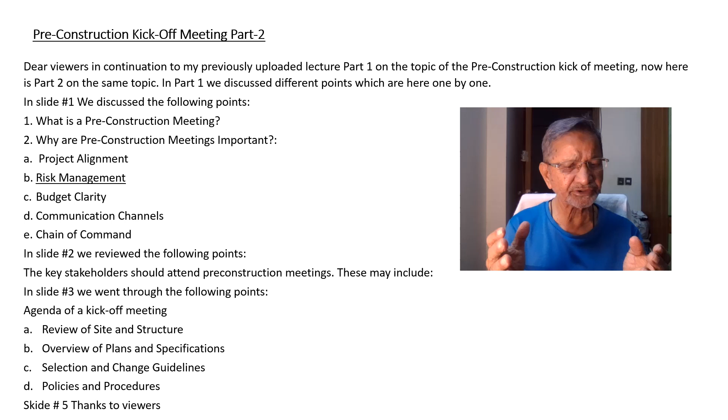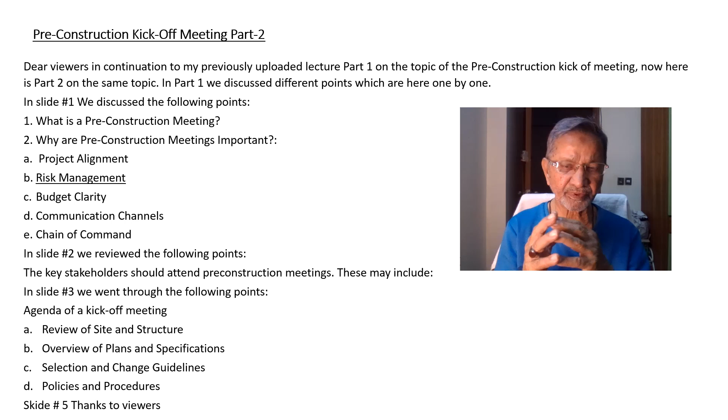In slide number 3 and slide number 4, we discussed the agenda of the kickoff meeting, how to prepare the agenda, and what points to include. First is review of the site structure, meaning to go through and walk the site to see the nature of the project site. Then overview of the plans and specifications, where all documents are gathered at the table of the pre-construction meeting and reviewed and confirmed by the client, contractor, and other stakeholders, so everyone understands everything.

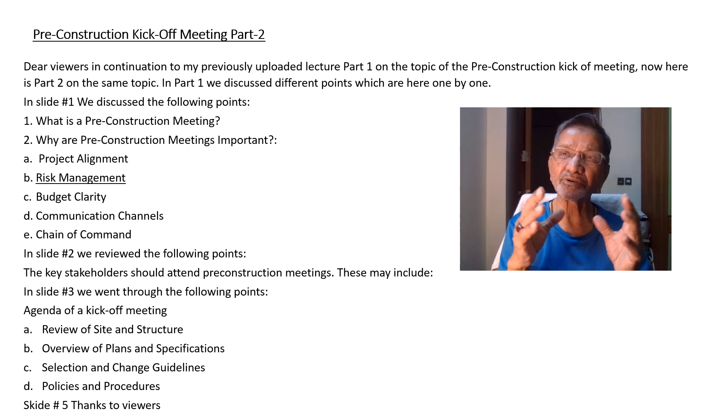Selection and change guidelines: if there are any changes during execution of the project, a change request must be raised and signed by the concerned authority who is changing items, in a plus or minus way. Then policies and procedures: what are the policies of the project, how to run the project, and the methodologies of the project.

These points were discussed in slide number 3 and slide number 4 of my previous lecture on the same topic, pre-construction meeting part 1.

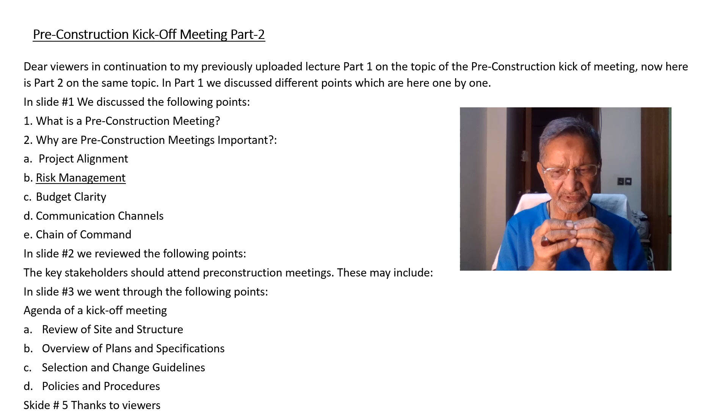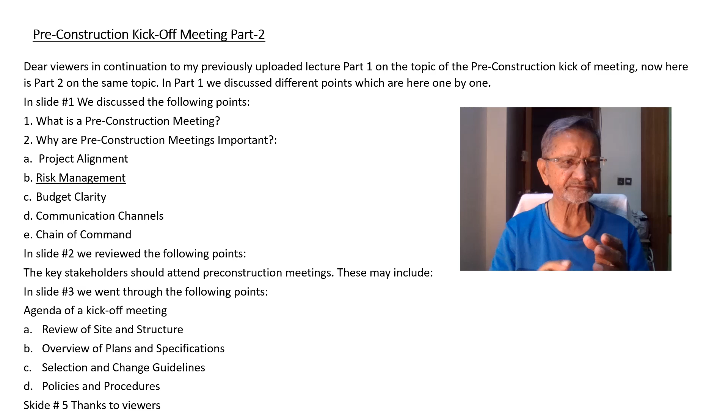Dear engineers, architects, viewers, we are discussing the pre-construction kickoff meeting part 2. The first part, as I explained earlier, I have uploaded on my YouTube channel. I once again request you to please go through part one of the same topic of the kickoff meeting, so that you can understand what happened previously and what is going to be noted down in this lecture.

So number one, in slide number 2: how to prepare for the pre-kickoff meeting, how to make and note down the points, and all the documents to have with you while attending the meeting. These documents are all the agreed and approved tender documents, including the bill of quantities, the specifications, the signed and agreed contract document, the conditions of contract, and especially the drawings. All the drawings must be at the kickoff meeting.

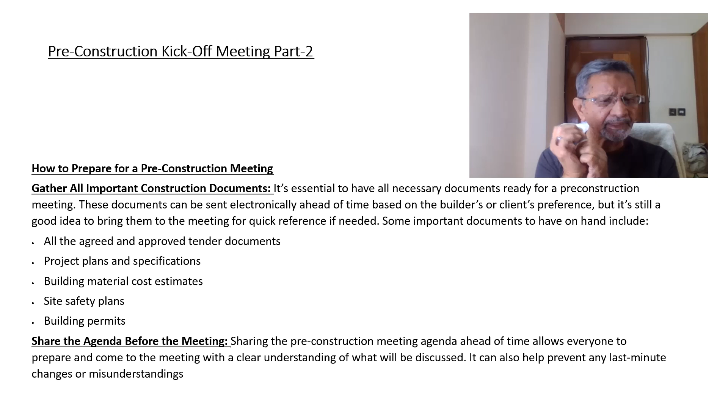Number 2 is the project plan and specification: how to execute, and how to monitor the project. All these things are to be discussed in the meeting.

Building material and cost estimate. This is to be continued throughout the project, but in the kickoff meeting you have to discuss this point also briefly.

Site safety and site safety plans: what site safety plans are shown in the contract document. These site practices are to be followed and implemented by all the stakeholders for their part of the job.

Then comes the building permits. You have to have the approved building permits from the local authorities. They have to approve it, so that at any time the local authorities visit the project, these documents should be available with you.

How to share the agenda of the meeting? This is very easy. You can share it electronically, or by messenger, or by hard copies, as per the clients' and stakeholders' requirements.

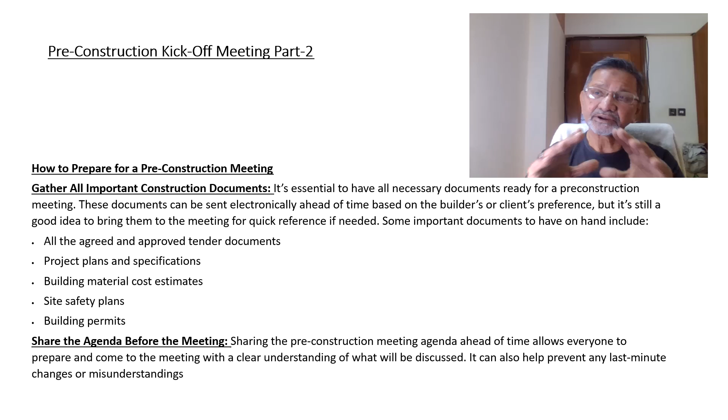The meeting should be prepared with very clear understanding that all the points to be discussed must be understood by all the stakeholders, so that you can make notes, compile all the points, and share them with the stakeholders after the meeting.

Yes, if the agenda is prepared, it must be shared well ahead of time, so that all the stakeholders can understand what is going to be discussed in the kickoff meeting, and they will be well prepared. Thank you very much. So all these points are to be discussed in the meeting, and you have to take care of that.

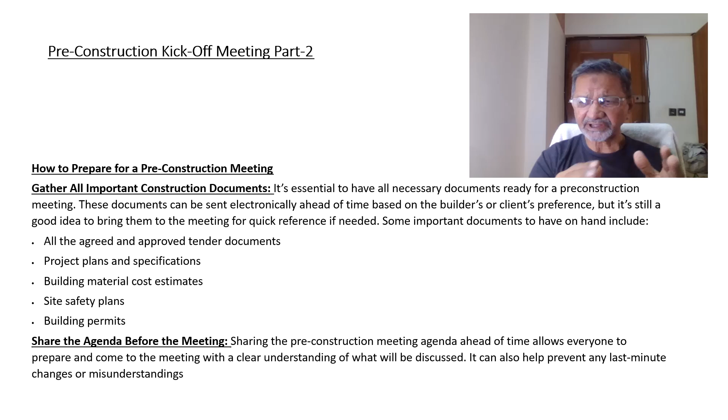Dear viewers, this kickoff meeting is very important to be conducted. This is also called a pre-construction meeting. It is held before construction starts, so that all the stakeholders on the project and related to the project have their expectations, responsibilities, and schedules updated to them.

Second point is the agenda, how to prepare it. Normally the project manager prepares the agenda. As I was also working with a project management company previously, I was preparing the agenda for those meetings.

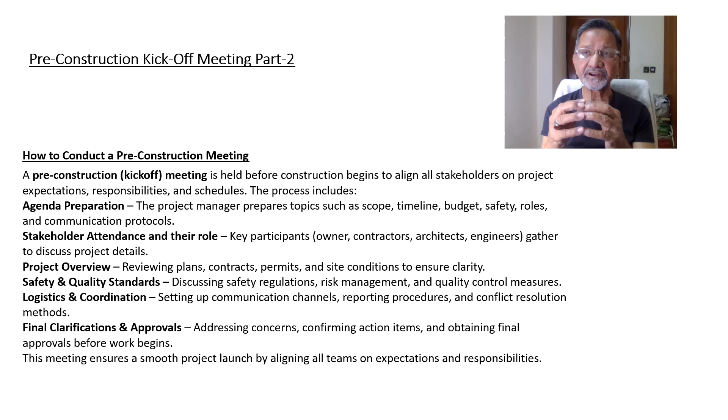Stakeholders and their roles is also very important. All the stakeholders must be present in the meeting, and their roles updated to them, so that the client, the contractor, the consultant, and the project management company implement all the responsibilities and methodologies of the project, with all parts implemented by all stakeholders.

Then project overview is also there. Reviewing plans means the drawings, the contract documents, the permits, as I said in my previous slide. The same thing is repeated so that everyone understands what is what and what is to be done, clearly explained to them.

Safety and quality standards are very important. Not only the contractors, but all the stakeholders must follow and implement safety at their parts, and quality is to be controlled throughout the timeline of the project.

Logistics and coordination is also very important. If there is no coordination, contract failure is inevitable. So each and every time, the stakeholders must coordinate and communicate with each other.

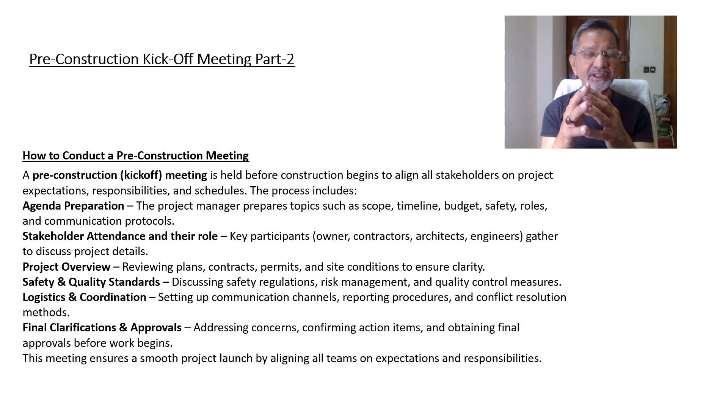Finally, the approved drawings, approved documents, and approved procedures are to be updated to all the stakeholders. They should also confirm that they went through the documents sent earlier to the essential stakeholders. The meeting ensures smooth and safe proceedings are concluded, and thus all the stakeholders make a visit to the project.

Thank you very much. Dear viewers, in continuation to the earlier slide, I will once again discuss a few more points on how to conduct the pre-construction or kickoff meeting.